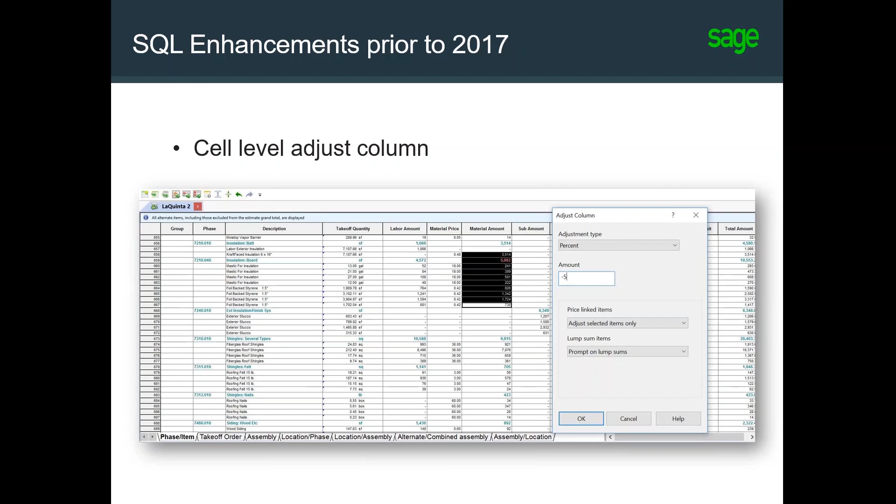They've updated the ribbon bar. In 17.11 there were 15 enhancements. A major one of those was updating the ribbon bar to comply with the latest Microsoft standards and such. You can also insert a column right from the spreadsheet, which makes it really easy to just add those on the fly if you need to.

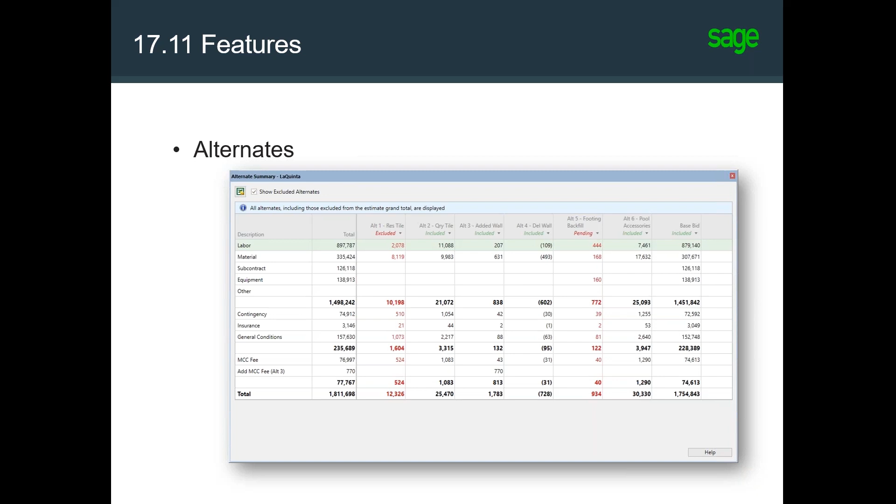So there's material prices added to the spreadsheet just with a couple of clicks. Alternates are also part of the system now, added. One note here: they were added in 17.11, but they were refined in 18.12. So if you use alternates, please, please, please upgrade to 18.12 because there was some math that was not running right and is now. As well, you can see that we have the red columns there for excluded alternates. I'll show you more in alternates as we go forward.

Also in 17.11, Sage 100 Contractor integration was added. We had 300, they added 100 integration. And data connector, where we can use Excel to populate certain fields in the system, like alternate statuses and locations and things like that.

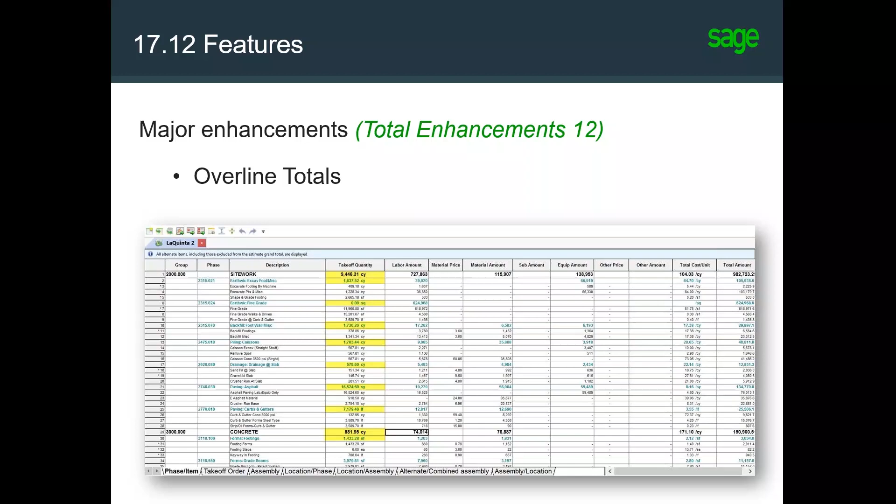In 1712, there were 12 enhancements. We added overline totals, so on the group phase now I can start to sort, sum up, and total to the group phase or phase level with overline totals. The user interface was modernized, made to look more current and cool. And they're always making performance improvements, maybe not as fast as a gold-plated Porsche, but performance enhancements nonetheless to the system.

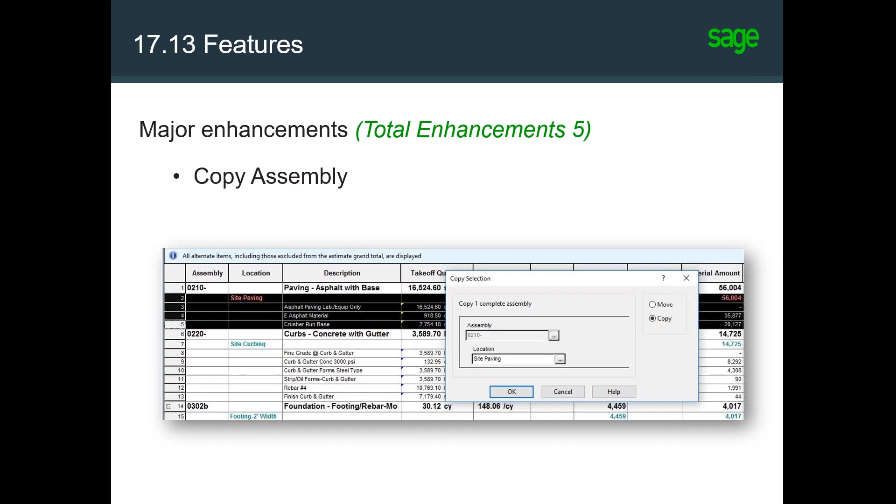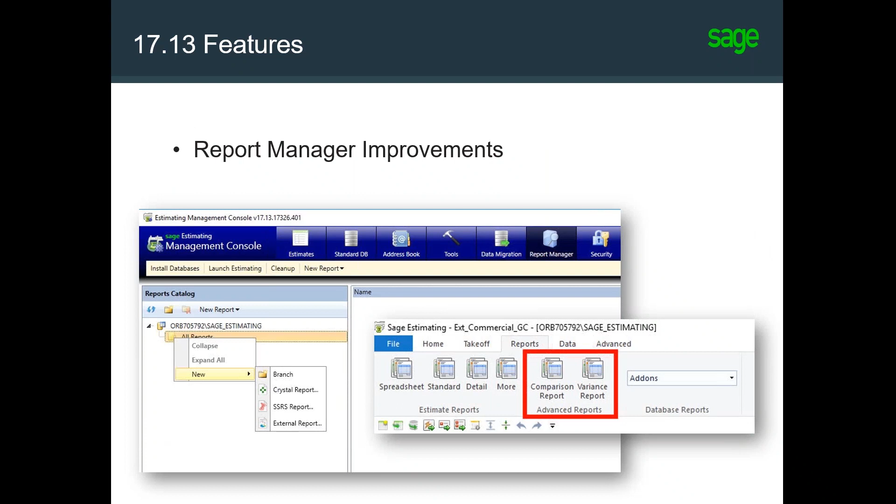In 1713, it was a minor release. There were 5 enhancements. We can now copy assemblies from one estimate to another. You can also move assemblies or items within an estimate using the same feature. Report manager improvements: we now have a comparison and variance report, and we can also use Crystal or SSRS reports. And enhanced database security—this is one of those things, like performance, that they're constantly working on to enhance the system.

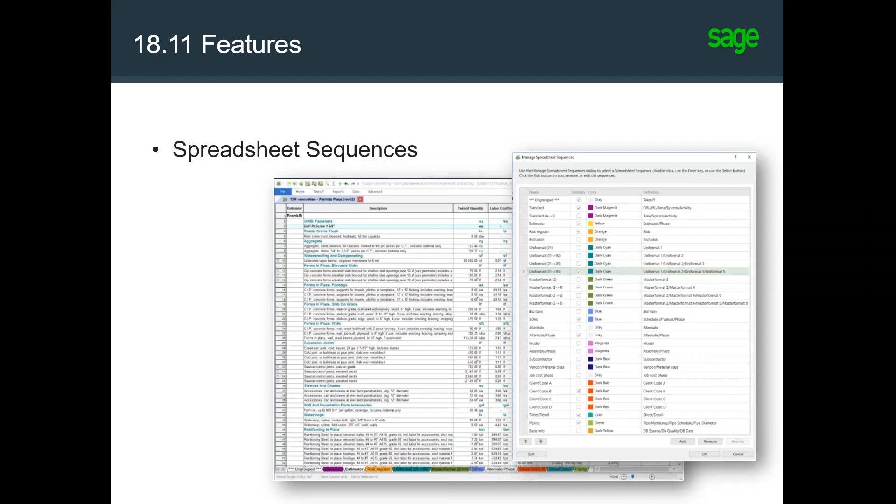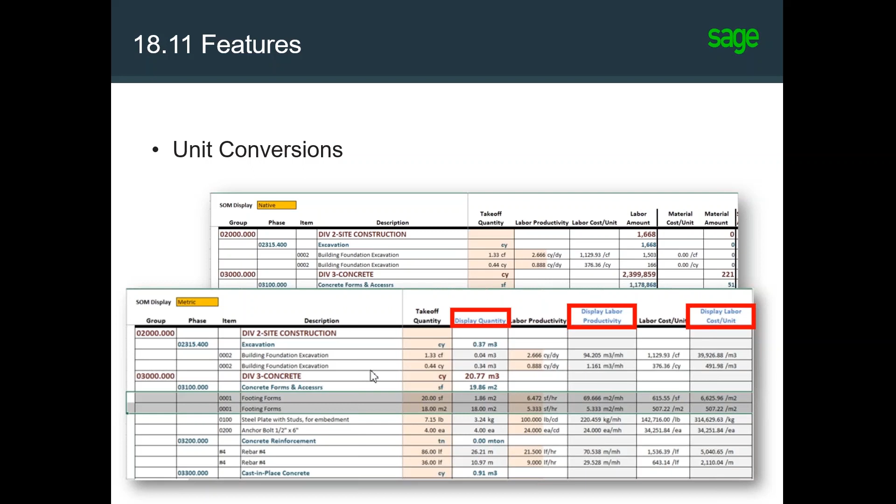Unit conversions: you can now convert from imperial to metric just by displaying the columns on the spreadsheet. There's what I have highlighted there with the display quantity, productivity, and cost per unit in metric. There's more coming on this as well. And finally, more on copy assemblies—that was refined, along with refinements to manage estimates, the report manager, and reporting. So that's just a quick list of the things that have been changed and updated.

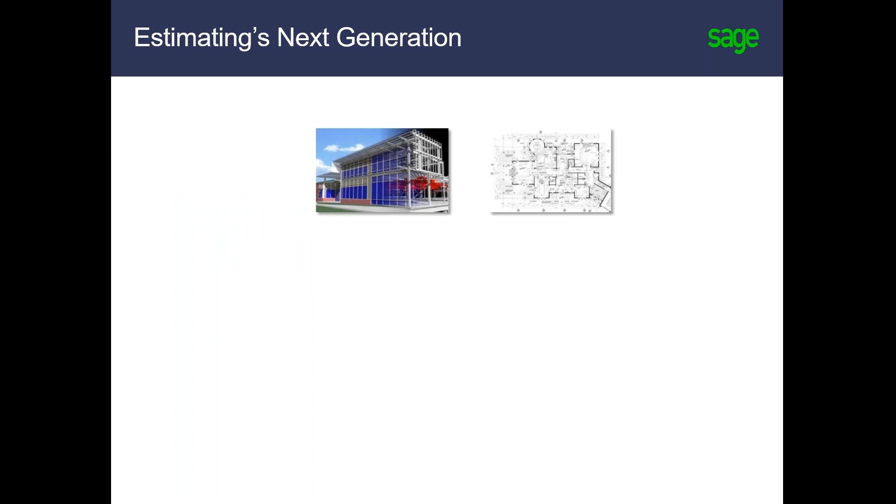We've also worked on estimating's next generation. What do we mean by that? We mean we are going to work with best-in-class solutions to get information out of a model or a plan set. In this next generation, that's where you're going to get your information—a model or a PDF plan set, whether individual sheets or a file. We're going to use Navisworks Assemble or eTakeoff Dimension to get information out of those takeoff sources, the model or the plan set. We're not going to develop our own viewer—it doesn't make a lot of sense and ties up a lot of resources. So we're going to use what other people have already created and what the bulk of the industry already uses.

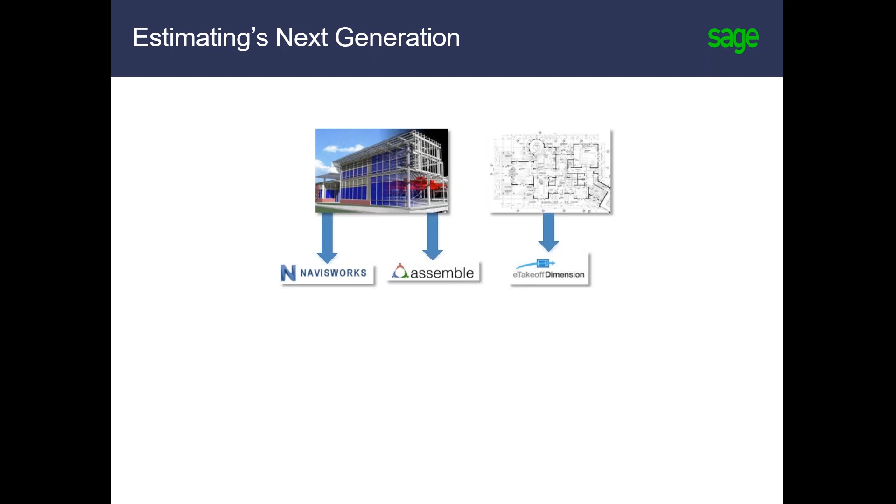So we're going to take those best-in-class solutions and bring them into Bridge. Bridge is another piece of software that is just that—a bridge between those best-in-class solutions and Sage Estimating. One bridge for all three: same product, same process, same features, and they all work with Bridge to bring your information from takeoff into Sage Estimating. Notice all the arrows flow from takeoff into estimating. They also flow from estimating back to takeoff, so you can drill down from the estimate into those takeoff sources and see where the numbers came from. I will show you that here in a bit. But that is what our data flow is going to look like.

And so with that, let's actually look at the demo here. We are going to start with eTakeoff. Here's eTakeoff—it is the 2D plan takeoff tool that we work with.

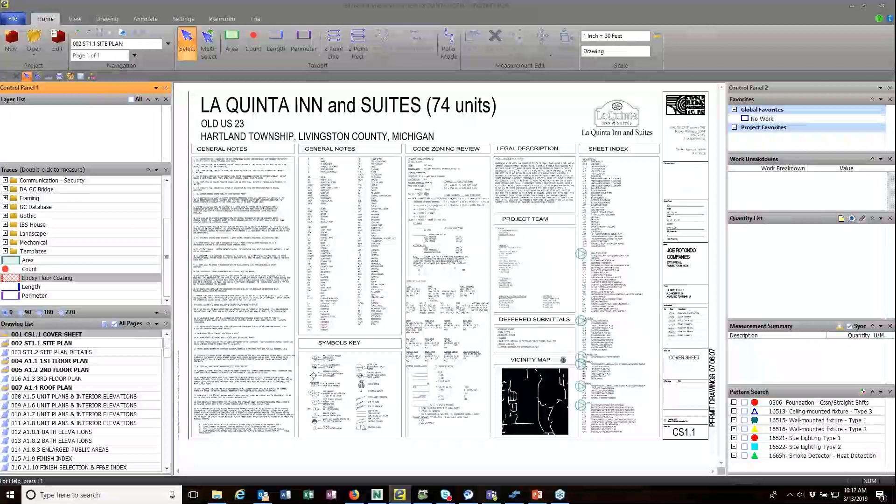In the middle is the plan set, and on the left I have my drawing set, with anything bold having takeoff done to the sheet. Right above it I have traces, which are measurements we use to create the measurements. Over on the right I have another control panel with my results. So if I go here to the site plan, I've got asphalt paving, curbing, and sidewalks, and an automatically generated measurement summary where I can see all the different takeoffs I've done and their quantities.

This asphalt paving, the lovely green color, was created using a trace right here - this one, 0210 paving asphalt with base. If I click on this, you can see not only the area I traced on the drawing, but over here in the quantity list I've answered some questions about the paving thickness and area, base depth, mix code, and other things. If you're familiar with Sage estimating, you might recognize these as assembly variables or assembly prompts.

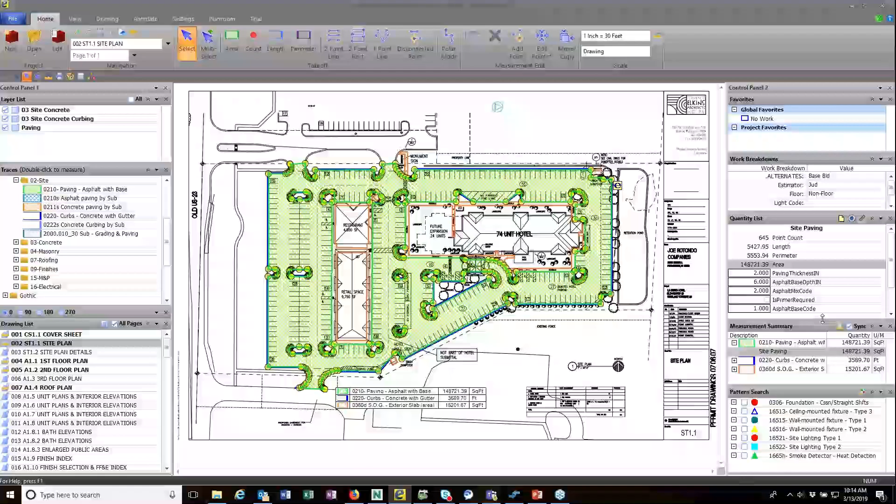We're reading the Sage assembly and filling out this detail and specification related information while doing takeoff, so I'm not having to flip back and forth, do some takeoff, then enter detail information, and go back and forth. I'm doing it all at once. So I can enter in the quantity list detail and spec related information.

And here above that, I can enter work breakdown information. So I can say this is an alternate, I'm the estimator, and it's not on a floor but it is part of the site. You can create your own WBS codes and populate those WBS codes here while doing takeoff, and they will flow into Sage Estimating.

So there's that. First floor, I've got some walls and here's my measurement summary. I've got some walls, some epoxy floor coating here around the pool deck and in some other rooms here. I'm going to do this really quickly.

I should have done this beforehand, but I'm going to delete these. And I'm going to say yes, and now that goes away. That's nice and simple. And down here I've got another epoxy floor coating trace, and it's real easy to create them.

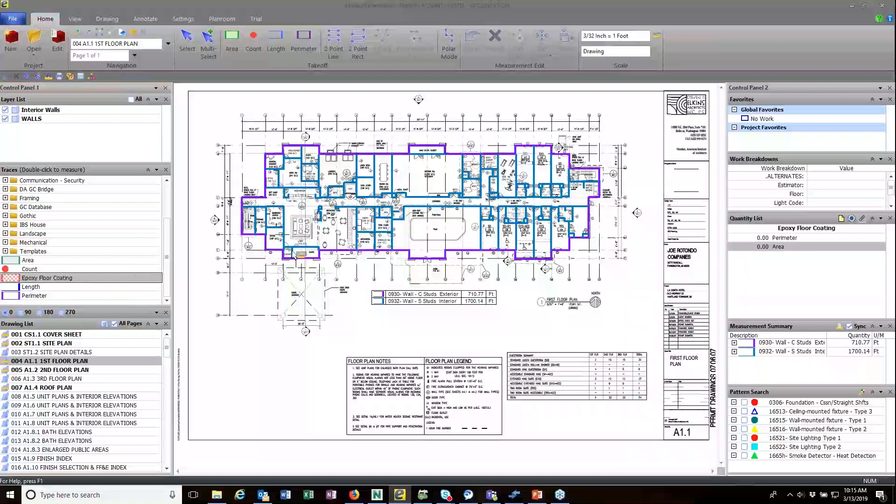I can just click this button and create a trace. They're real simple. But to use them, I can double click on this, zoom in here, and start to trace around the pool, like this, and this, and this, and that. So I've traced the pool area. I can zoom in real tight and get really spot on with those intersections if I want to. You see over here on the quantity list it's 1,900 square feet.

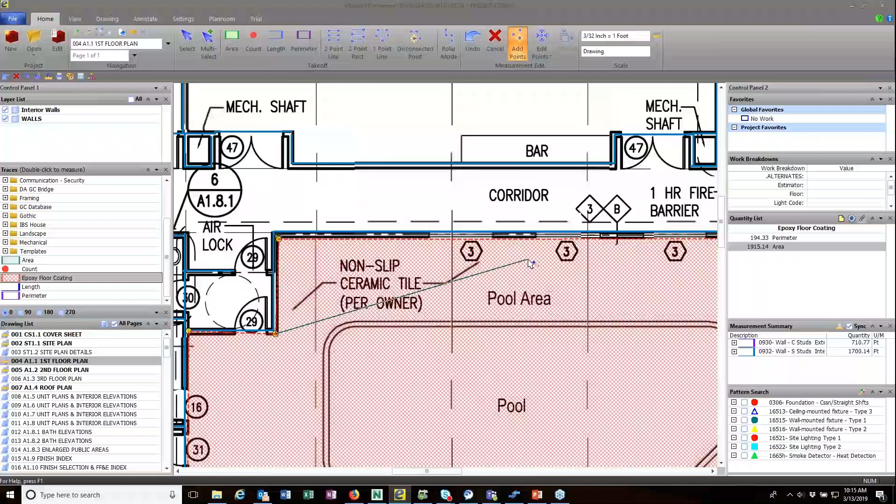Okay, well that's fine, but I need to take the pool out. That's no good - I don't need to epoxy coat the pool.

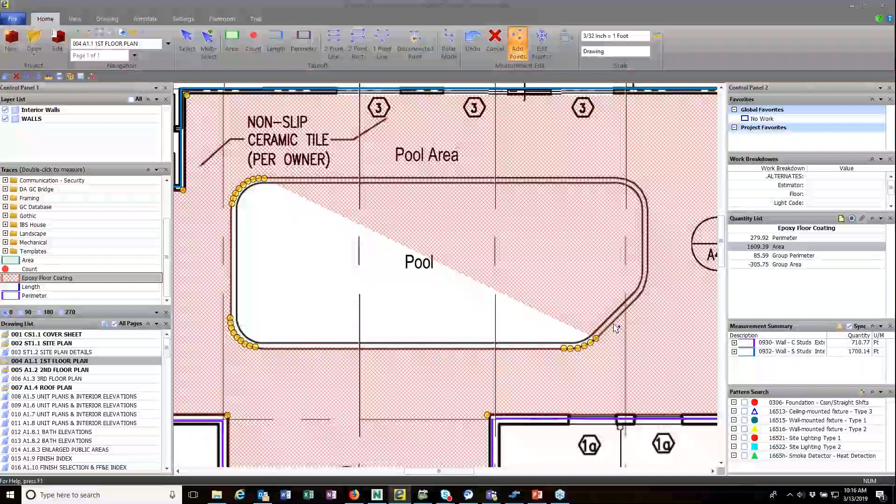So I can use this disconnected point button up here, and I can just click the beginning, the middle, and the end of that curve, hit the C key, the beginning, the middle, and the end of that curve, hit the C key, beginning, middle, end of that one, and I'm just going to trace around here, and this one, and this one, and that one.

C key. I can hit the D key and enter in a description - let's call it pool. And so now I've got pool epoxy floor coating, and it's 1,300 square feet.

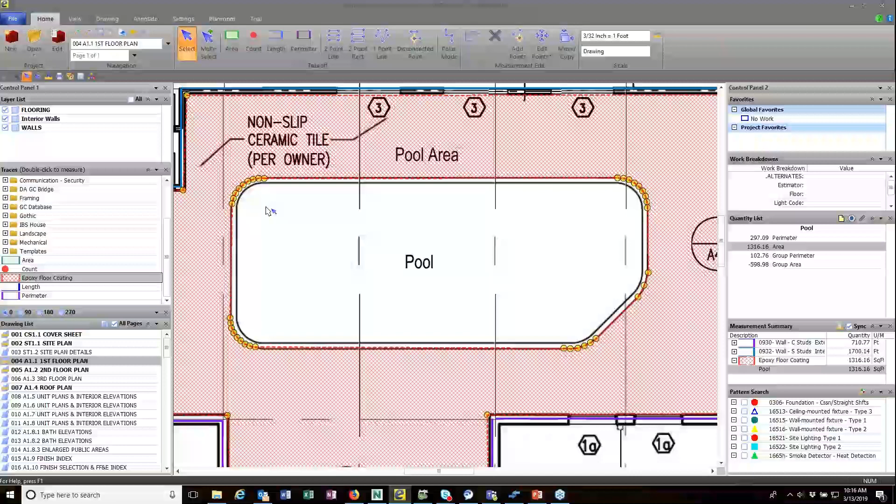So you'll notice that when I did the original trace, I went clockwise. When I did the donut in the middle, I went counterclockwise. That's the key to getting that removed.

I can also add - let's do some more here. I'm going to put epoxy floor coating in these two rooms right here. I can do this, and I can do this. Okay, so I can do takeoff pretty easily. It's quick. We'll just call this

mechanical rooms. And now over here on the right I can see those different takeoffs. Let's just do this - I'm going to come up here and select this, let's select this, and I'm going to say that these two are part of the base bid. The estimator is Jud, and the floor is first floor.

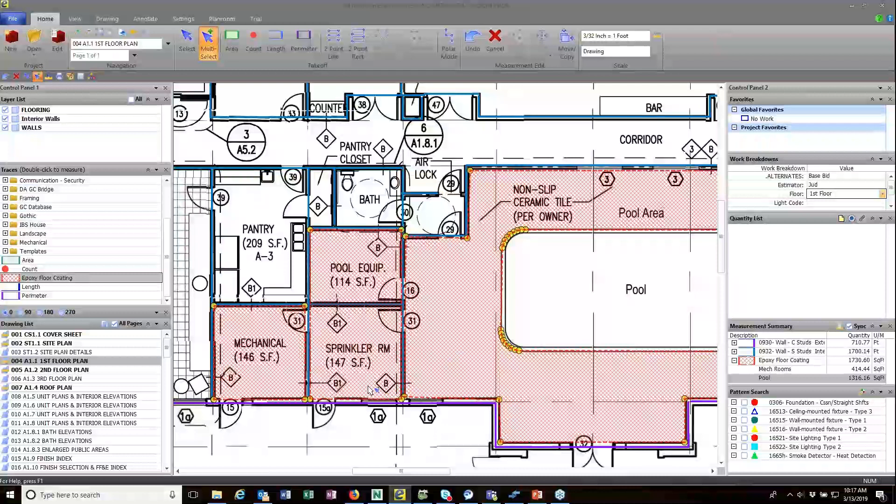I've now completed my takeoff for the pool deck. You can see that was pretty quick, and it will be very quick to send it over to the estimate. Let's go here to the second floor - I've got all of these traces here. These are all different kinds of carpet and base.

Again, same thing. I just went around, traced around, whether it's length or area. If I go here to the third floor, you'll see that the third floor is a mirror image of the second floor, a copy of the second floor.

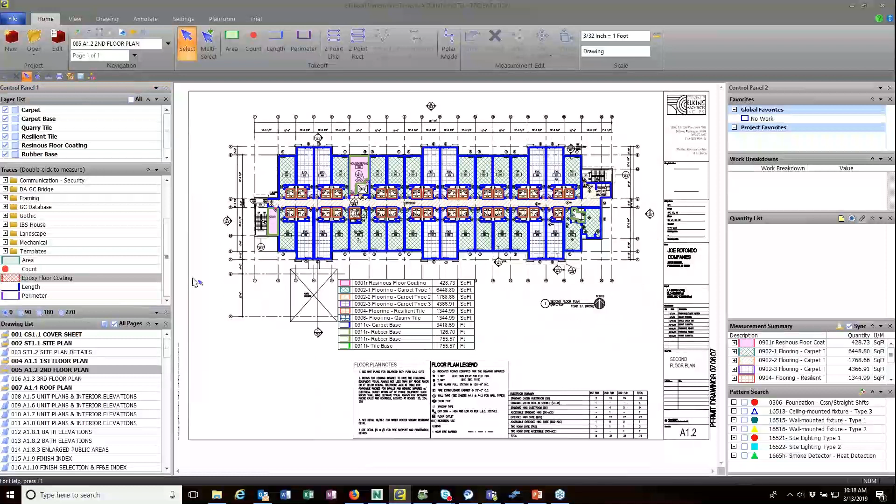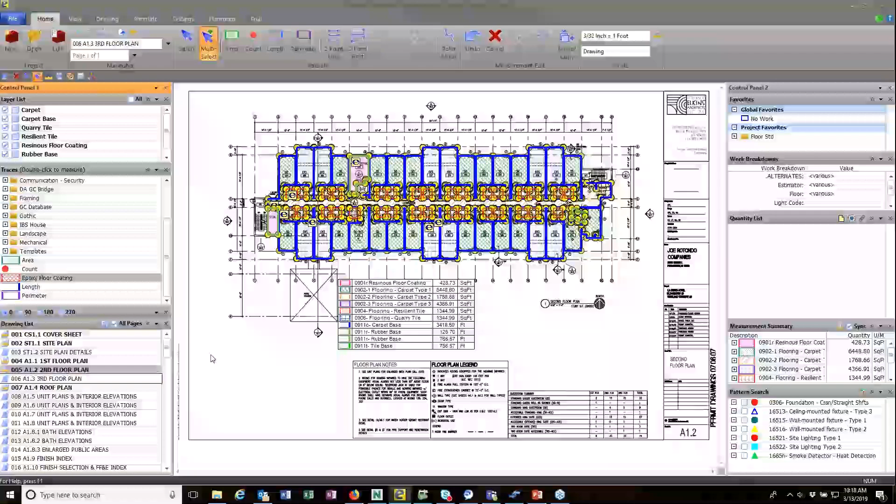So rather than redo it all, what I can do is copy it. I can multi-select all of these and drag them over here to the project favorites. It says 10 measurements, so I can just call it flooring standard in case I had a bunch of them. Go here to the third floor, and I can take that flooring standard and drag and drop it back like that.

So now I'm almost done. I've created the third floor. I'm going to click this multi-select button again, select these, and say that this is the third floor. You'll notice that the alternates are various. Why is that? That's because I've assigned my alternates here in takeoff.

Over here on the left, I've got layers. So if I turn all of these layers off, I can say just show me the carpet, and there's the carpet. Or I can turn off the carpet and say just show me the quarry tile, and here's the quarry tile in the bathrooms.

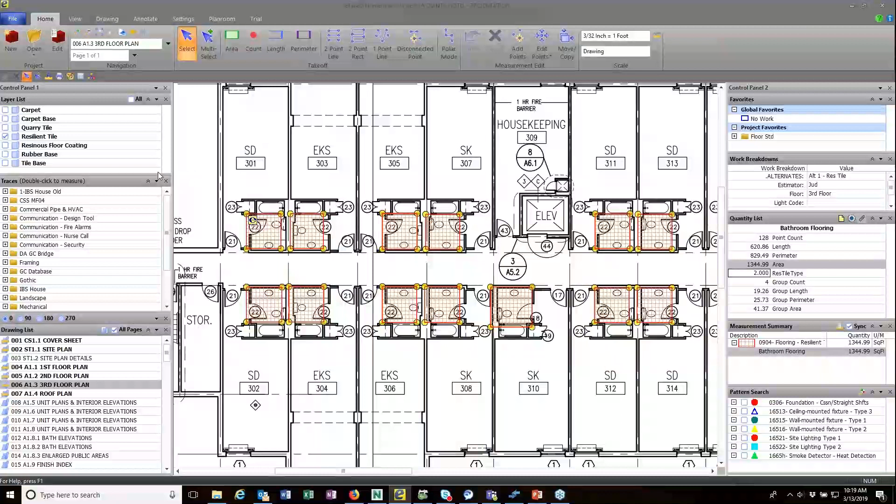If I select that, it says that's alternate number 2 on the third floor quarry tile. I can turn off the quarry tile and select resilient tile, and that's alternate number 1. So I've assigned alternates here on the takeoff while doing takeoff in the plan set. Turn all these back on so we can see everything, and there we are. So now we're back to where we started from.

So you can copy measurements, whether it's flooring or whatever it is that you do, from one area or one floor or one drawing to another.

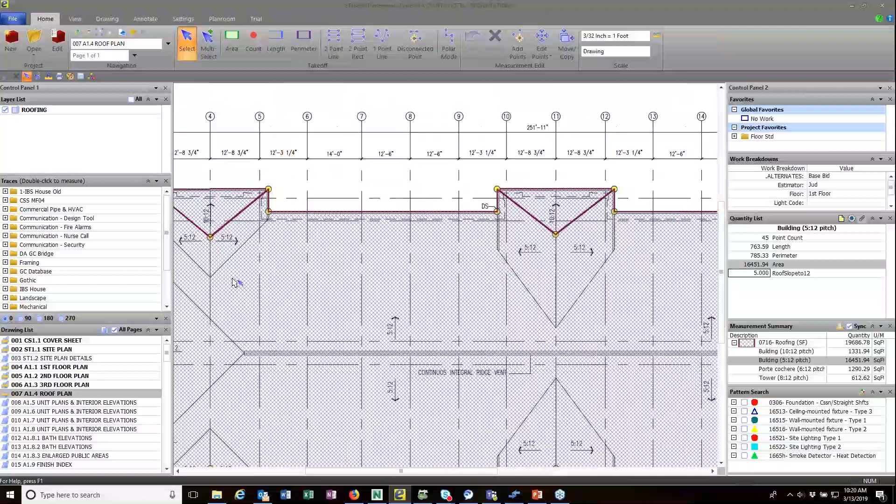The roof plan is just a very simple roof plan. It does have—I did enter the roof slope to 12 so that the system automatically calculates the area, the number of bundles of shingles that I need, rather than just the plan area.

On the exterior elevations, you can do exterior elevation takeoff as well as plan takeoff, doesn't matter. All we're doing is tracing areas around a PDF.

If I come down here to the foundation plan, I've got several things going on here. I've got these structural slabs, grade beams, footings on the outside, and these caissons around here. Let me delete this because I want to show you how these caissons were found. These were found using a feature called pattern search.

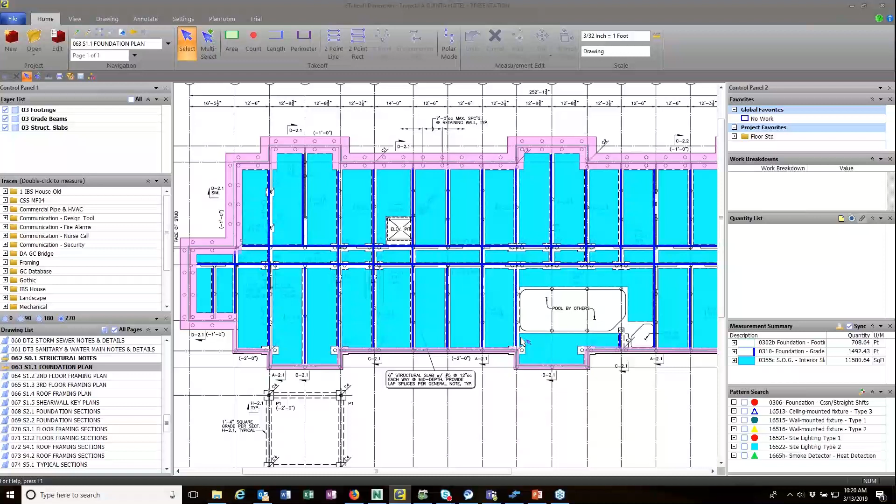If I'm going to do pattern search, what I want to do here is show the search areas. This is the area I want it to search in—I don't want it to search out here in all this extra white space. I just want it to search in this area, because I don't want it to count in schedules or keys or things like that, just the plan area. So I define a search area and called it S1.1 to match the sheet number down here. You can call it whatever works best for you.

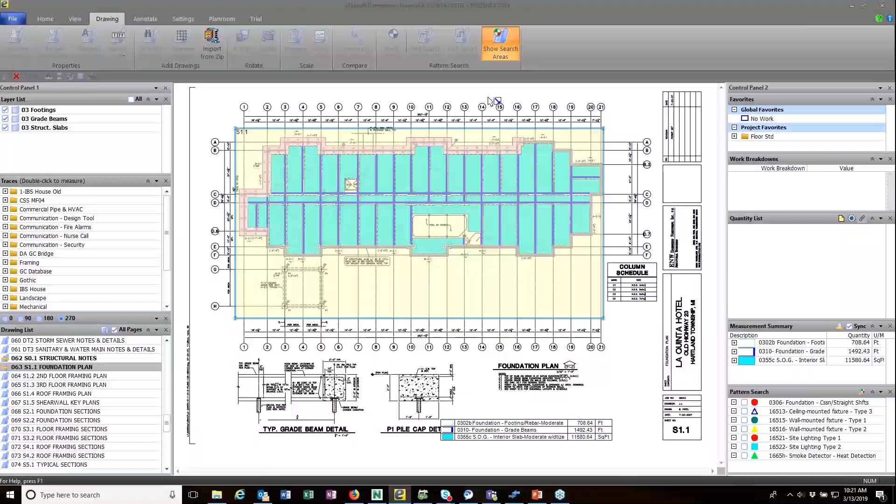When I get the search area done, I can click this Start Resume button up here, and my cursor changes—now it has that little square with an arrow in it. I'm going to zoom in nice and tight right around this caisson and say I want it to look for that. Pattern search can work on a pattern like this dashed circle, it can work on text, it can work on whatever it is you want to search for. And it does a fairly good job of finding things too.

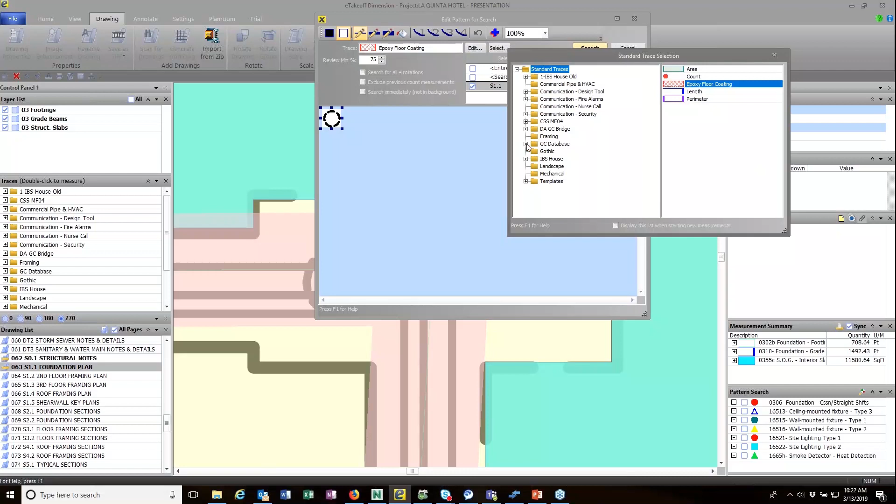So it depends on what you're searching for. I wanted to search for this, so where do I want it to search? I want it to search that S1.1 area, that light yellow area. And what is it? Well, it's not epoxy floor coating, that's the trace. It is GC database concrete. It's a caisson, so this is what I'm looking for, this is where I'm looking, this is what it is.

And I click search, and down here in the bottom right you can see the progress of my search. It's found 100, and there we go. And it found 244 of them.

So I'm going to double click on this, and these are all the ones that it found. You can see some of them are nice and clear, like the one that I picked, and some have got a little kind of stuff going on in the middle, but it found them all, so that's good.

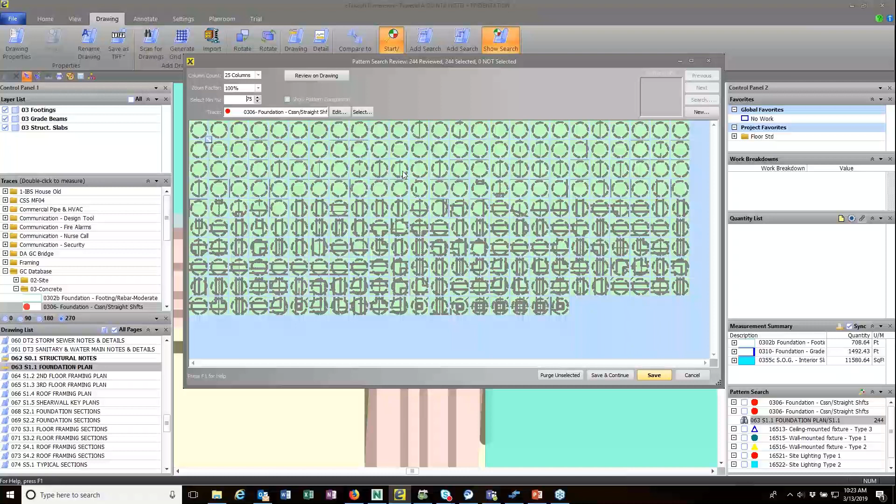What I want to do is review them on the drawing, so I click that button, and there's all the ones that it found. I can say, well, those look good, except I know that this one, and this one, and this one, and this one, for the portico, are going to have different depths than the ones on the building.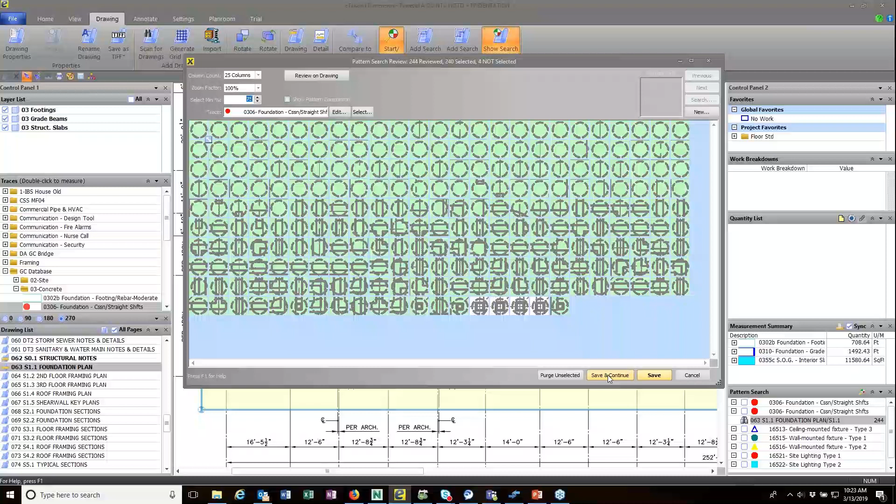So I can say okay, that's good, go back to this Start Resume. Now you see these 4 are removed from our selection set. Anything that's green is part of it, anything that's white is not. I'm going to click this Save and Continue button, and now that removes all of those from the building. And then I'm going to just save those.

So I've just counted all the caissons, but I've got 2 different sets. And you can see here this little red E right here. If I select this, it says, oh well, you haven't entered the depth of the caisson. So I'll just say that it's 30 feet, enter. And I'm going to say that these are 20 feet, enter.

Now I can also come in here and I can go to home and I can multi-select, and I can say this and this. This is all part of the base bid. And it's on, I know it's, we'll just say it's the first floor for this. And so now I've done that, and I can enter in these other ones as well, other WBS codes as well.

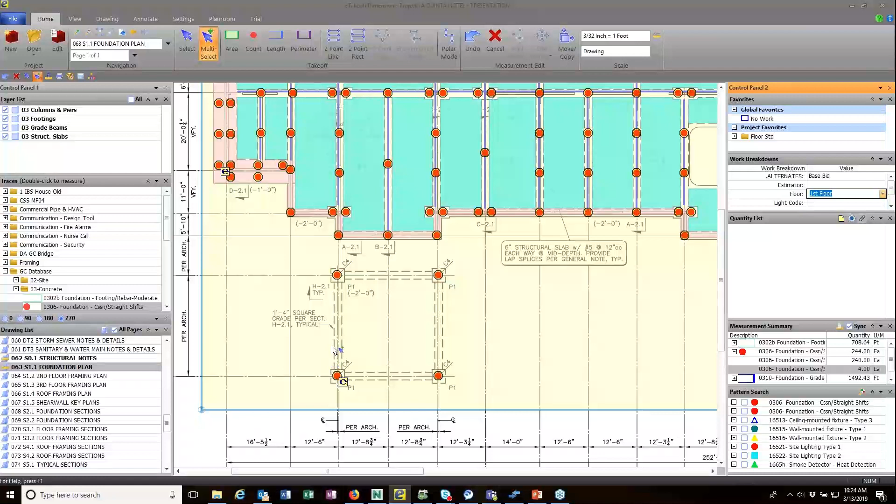All right, so pattern search is a cool feature. And also looking here at the interior elevations, here on this sheet, same thing, got the measurement summary here, but what I wanted to show you here is most of these elevations are 1/2 inch equals a foot. This one over here is an enlarged floor plan, it's 1/4 inch equals a foot. And down here's a detail at 6 inch equals a foot.

I can have multiple scales on the same drawing. So other systems make you copy the drawing and set a scale for the entire one. This does not. We've got a standard scale up here, you can see it's 1/2 inch equals a foot for the whole drawing. And then everything inside this blue box is 1/4 inch equals a foot, and everything inside this box is 6 inch equals a foot. So you can have as many different scales on a drawing as you want.

The other thing that we can do here, I'll show you on this drawing, is that we can compare drawings. So I click this compare and go here, and what do I want to compare it to? There's an addenda that I have. So I'm going to click that, and I click the align button because I may want to align it.

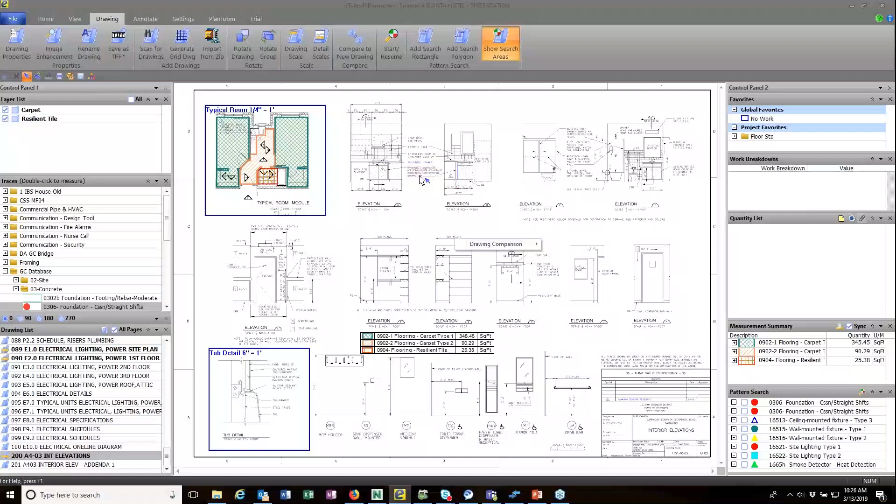So let's go back here, and I can zoom in. Here's the changes, and I can highlight those changes. I can say show me, just emphasize the new stuff, or just show everything. So I can start to really see pretty obviously where the changes are.

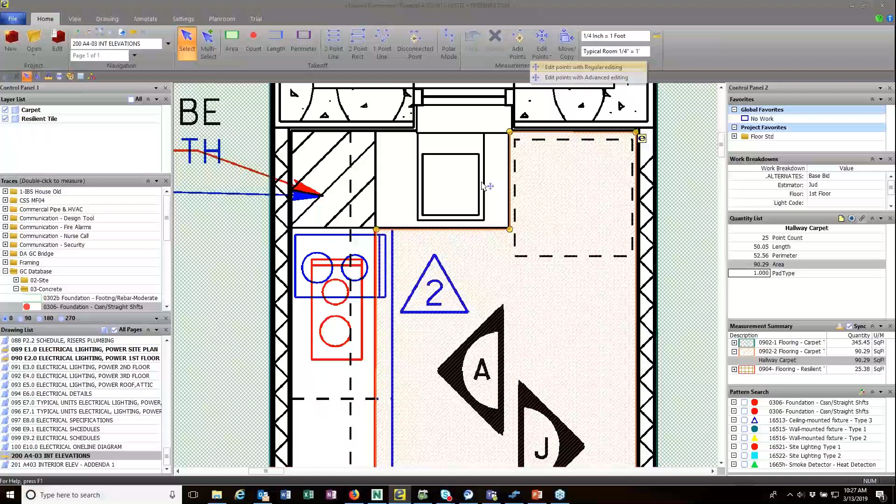In addition, if I come over here and highlight this, you can see I've got changes here. The stove changed from this orientation to this orientation. And I can come in here and edit the point, so I can change my takeoff to match the new configuration. Like this, you would add another point in here to get through to this little area, but you can start to change your takeoff to match that new configuration.

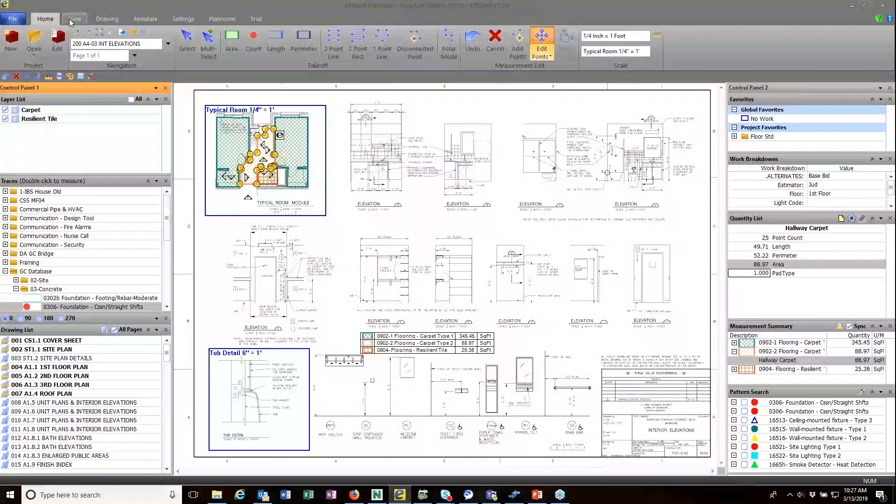All right, so takeoff, lots of features in there. There's a lot here, but what I want to do now is show you how we can bridge that over to our estimate. So I'm going to click the View button. I'm going to start Bridge, and remember, Bridge is that product that ties the estimate and the takeoff together.

This is just saying there are no bridges associated. Do I want to create one? And I am going to say yes. It'll...

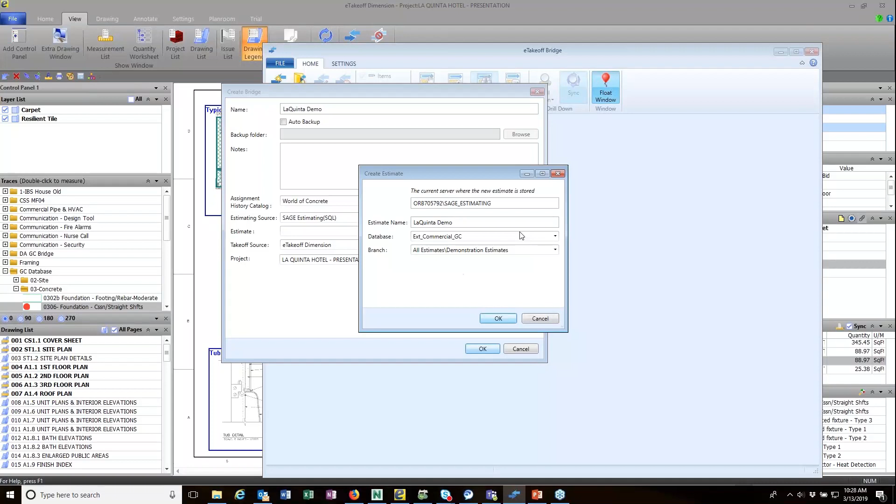LaQuinta Demo is the name of the bridge. I can also create or browse to an existing estimate here. I'm going to create a new one and just call it LaQuinta Demo. And I'm going to click OK. Click OK.

Here is the bridge. It's simple. There's not a lot to it. If I just go here to the file, you can see this is pretty simple. Home is where you spend 99.9% of your time, and the settings is just one button. So it's really simple product. You can learn it in an hour or two.

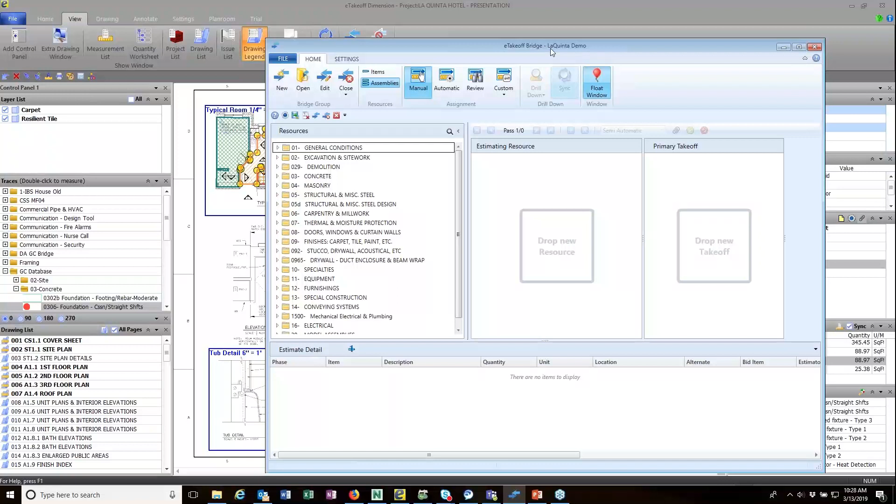What it's showing us here in the left-hand column are the resources. This is our Sage database, it's reading our Sage estimating database. Here is my list of assemblies. I can also read items. So I've got concrete, and there's my different concrete assemblies, and I've got other things. You can see I've got a whole list of assemblies in here. Items, I can say there's doors, and there's wood doors, and there's all my wood doors in my Sage database.

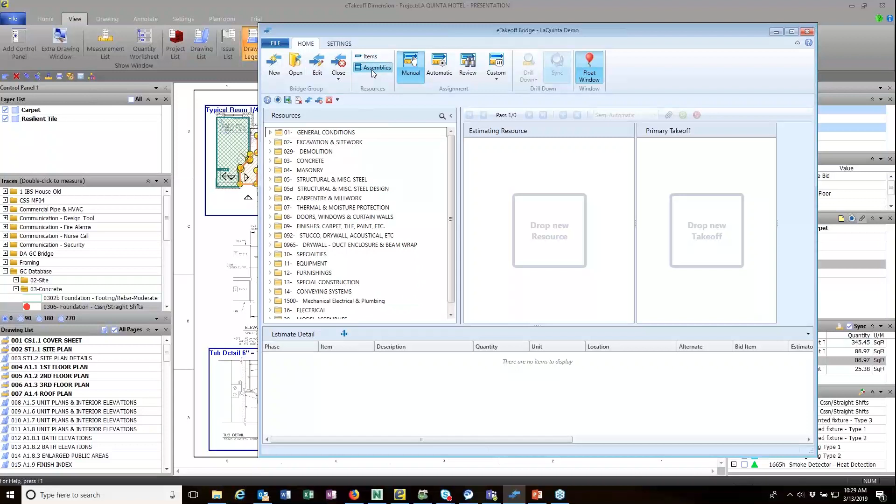Question is, why do I care? The reason that I care is that I want to map measurements from my takeoff to wherever they go here in Sage Estimating. So for example, on that first floor, we did that epoxy floor coating. So what I want to do is, I know that there is an assembly here, epoxy floor coating. What I do is I take this and drag it and drop it to epoxy floor coating.

And then what I need to do is say, okay, here is the assembly, this is what the assembly expects. It's a very, very simple assembly, it only wants the area of the epoxy floor coating, doesn't want anything else. And this is the information I have available from takeoff over here on the right. You can see that I've got an area, and then I've got an area here. And all I did to map those was drag and drop.

And I did the same down here with WBS information. So there's the drawing description got mapped to location, and the alternate got mapped to base bid, base bid got mapped to the alternate, and the estimator got mapped to the estimator, and the floor got mapped to the first floor. So I've mapped these.

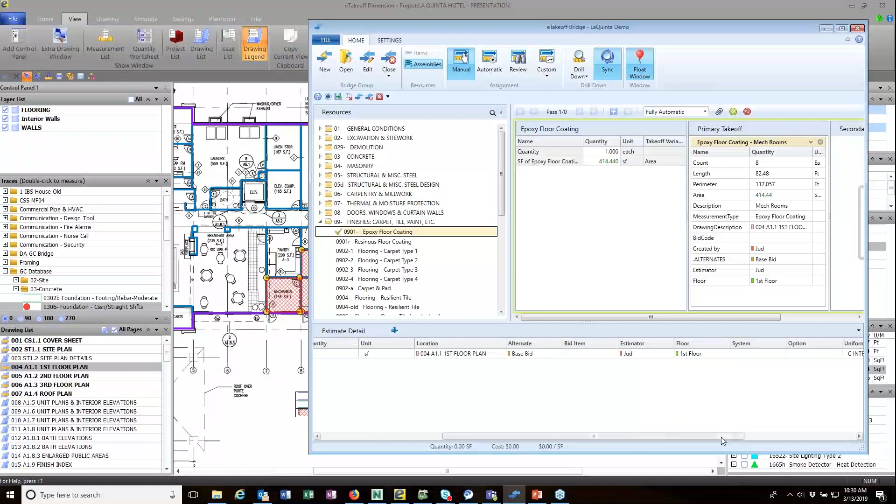Now the question that I get a lot is, so do I have to map it every time I do this? And the answer is no. I only need to map this during setup. Once mapped, always mapped is our saying. So if you've mapped these variables, these assemblies once, you never have to do it again for this project, for the next project, next week, next month, next year. And you can also share them with others in your company. So the mapping is once mapped, always mapped, and it's powerful because it does remember what you've done.

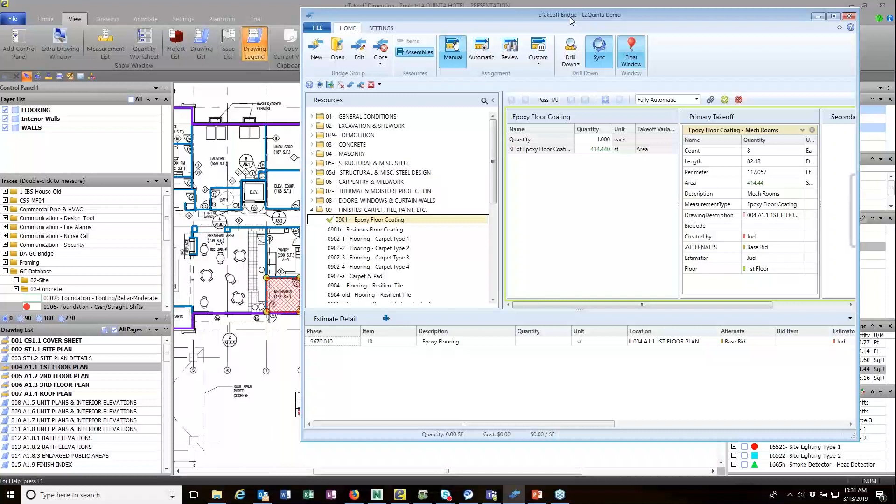And so going forward, it's really easy. Once you get this, it's initial setup only. Once you're done, it's quick, and I'll show you, you'll see that in just a second. Once you have done the mapping, notice I don't have any quantity down here. I don't, until I run the pass. That's this button. Now I get the quantity, and now I can send it to the estimate.

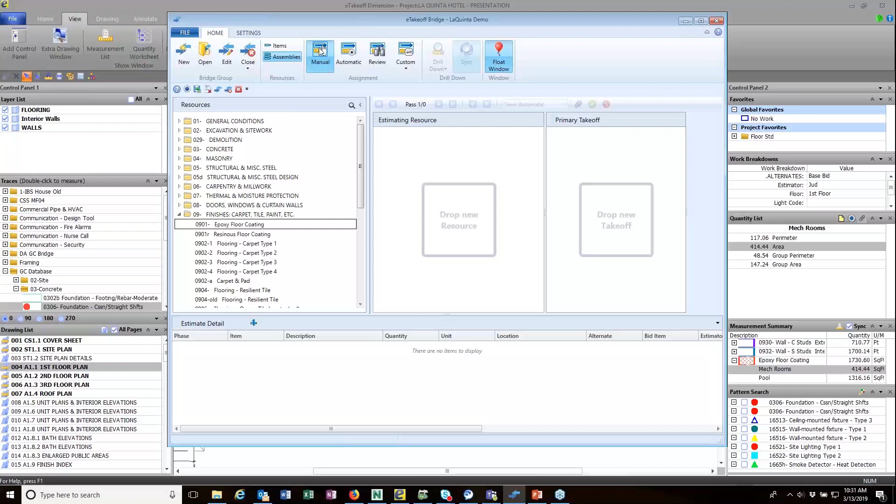So that's how you can manually send measurements to the estimate. Kind of long, a little bit clunky, but definitely something that's available for you as we're going forward.

And the other thing is that... just lost my train of thought.

That's manual takeoff. We also have automatic takeoff. So these are assignments or measurements that I've been through. I know that I got everything entered, and if I didn't, the system will catch it for me. So I just want to get these over into the estimate.

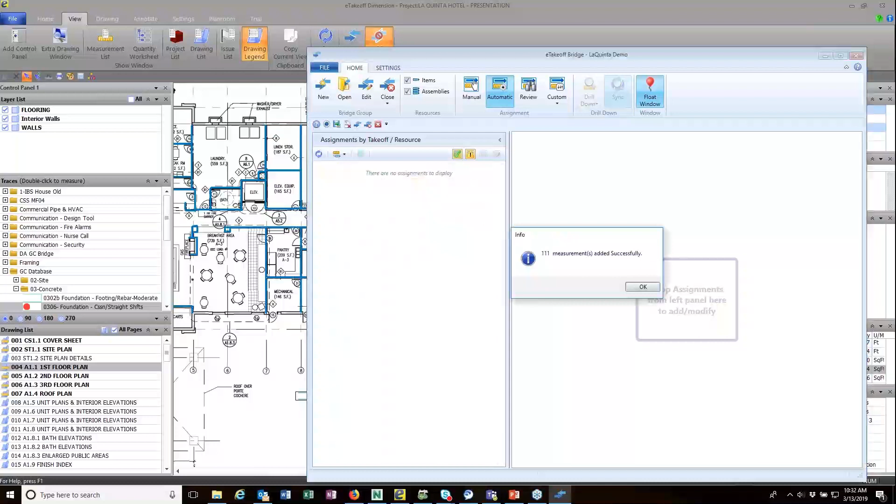So I can click this automatic button, and I can send 111 measurements over to my estimate while we're sitting here talking a little bit. So it's very quick, it's very thorough, and notice that I didn't have to cut, copy, or paste anything. All I'm doing is entering in the information here during takeoff, and then I'm passing that information to the estimate. So I'm going to click close.

I'm going to go to the estimate and minimize bridge, and here is my estimate. This is Sage Estimating 1812. You can see that we got a little bit different look. If you're used to looking at Pervasive, you'll notice that this is different. We've got home, we got takeoff, reports, there's the database, and the advanced as well.

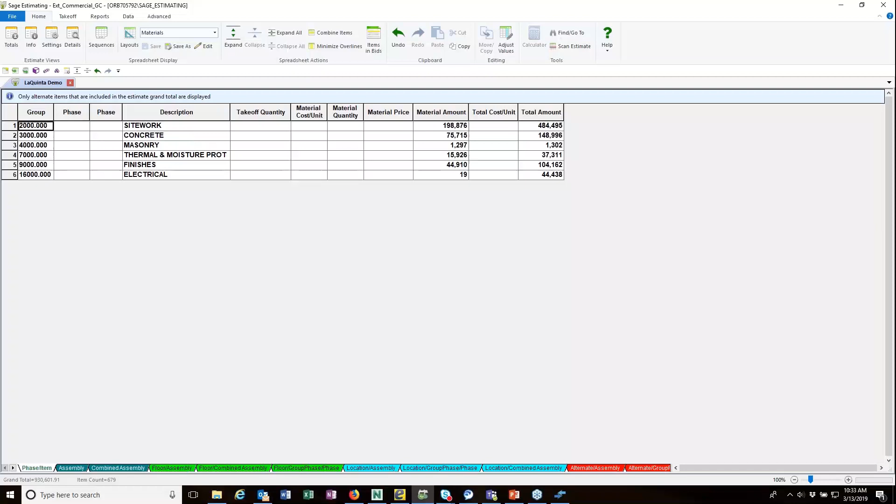On the home here, different things here we can do with a spreadsheet, right? We can collapse it down to summarize. There's a group phase and phase. There's just by group phase, or CSI division, same thing. Expand it back up. We can combine like items.

Watch the fine grade right here. And there we go. There's the fine grade all combined up. So there's things that we can do with the spreadsheet just like that.

One of the main differences here that I wanted to highlight is this spreadsheet display tab or area here. And we've got different sequences. Remember the sequences that I showed you in the PowerPoint? I've got these sequences set up down here. Unlimited number of sequences. I've colored them based on the first sort option.

So my assemblies are dark green and my floor group sequences are bright green and location, and then alternates. And then back down here at the very end, I've got one for job cost, an estimator. And so I can start to sort these anywhere or group these just like this. And I can do combined assembly, looks the same there.

And the thing is too now, layouts are not tied to the sequence. And so I have assembly view sequence and an assembly layout. I can switch this to labor productivity by assembly, or materials by assembly, or whatever I wanted to do. I can do that, and I don't need to recreate the layout for each sequence. They're interchangeable. And so that's kind of cool.

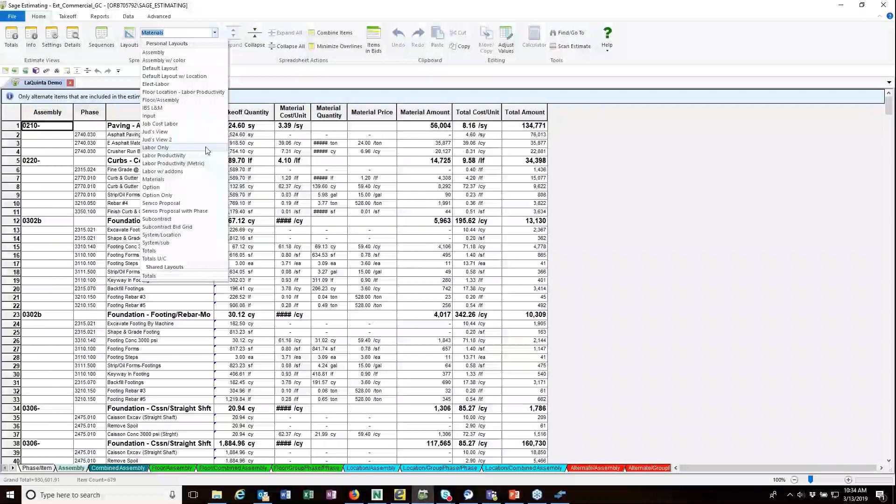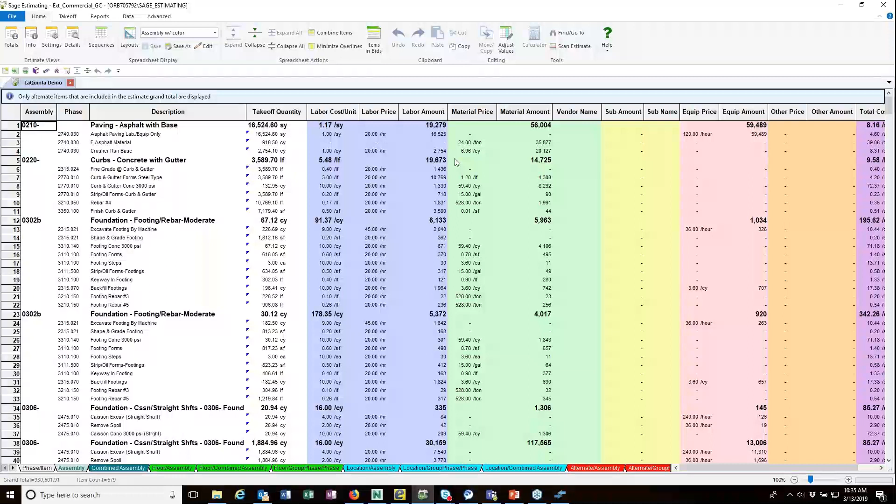I can even go wild and crazy and do a bunch of colors, which might not be a bad idea. Maybe if I always know that all my labor columns are blue and all my material columns are green, maybe this makes sense. So that's up to you. You can start to do some fun things though with it. That's great. I love playing with that just because it's kind of fun to see what I can do.

We also showed you - let's look at the totals here. And so we've got the totals page here. You know about add-ons and how you can allocate or not allocate add-ons.

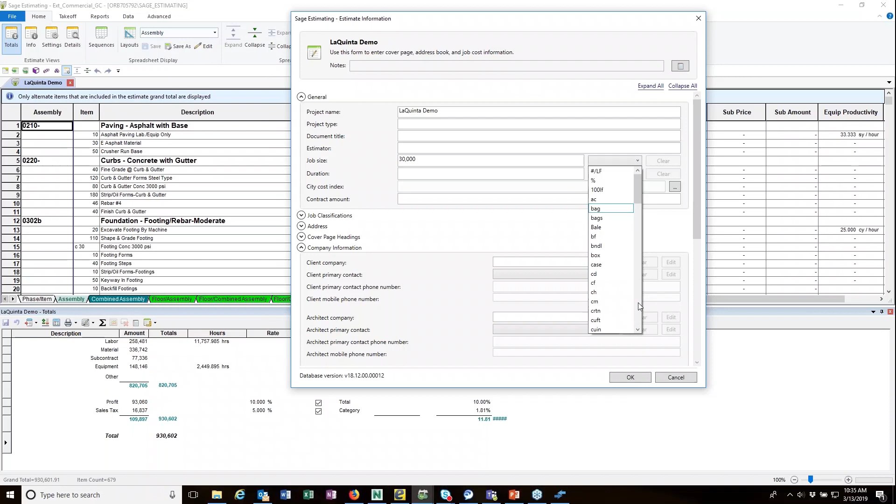If I went here to the information for this estimate, I could say that it is let's say 30,000 square feet. Come on, where are we here? There we go. And square feet. Okay. Now I have this column populated down here.

And so if our boss comes to us and says, you know what? I know the bid's due in 20 minutes, but we got to be at 30 a square foot to be competitive. So you just type in 30, enter, and you know you need to find $30,000 in this estimate. There's lots of ways to do that. I can say, you know what?

Our accounting department is really good, so we can adjust this. We can say we're going to get our materials for 5% less. What does that do for us? Well, that says that we now need to find $10,000, almost $11,000.

I could go through and back this out, I can do that, or I can come over here to the total amount and just adjust this column, and we are going to spread that $11,000, say okay, and trust that we can find that. We're now within $3 of the variance of the total we needed, and each one of these got knocked down 1.2%.

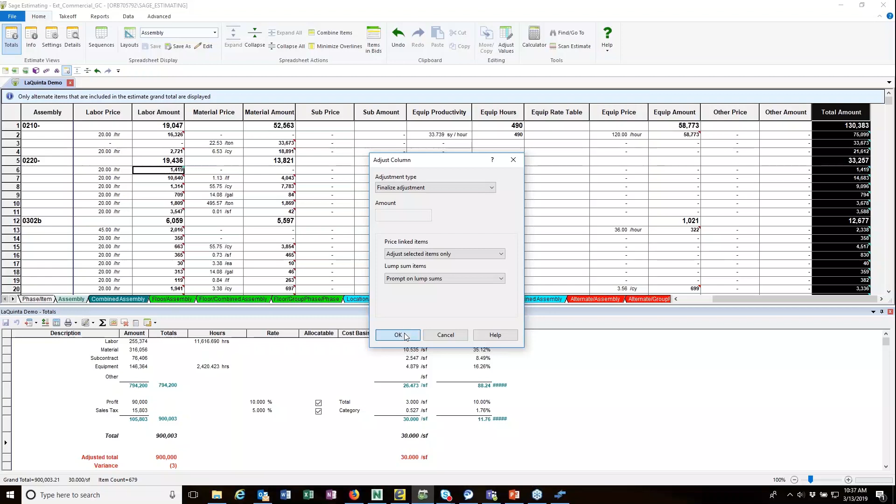So I can do that way. There's ways to adjust your numbers so your accounting department is happy. I can also come in here and finalize that adjustment and say okay, and now it is good to go. All right, so let's do this.

I wanted to also show you alternates. They are part of the system now. So here's the alternates, and I've got 2 of them plus the base bid. Before I do that, let's go to the alternate sequence, and I can see that I have some things that are not assigned to an alternate or base bid.

So I can highlight this and hold my shift key like this, and one way I can do this is just drag and drop down to the base bid. I can also, if I wanted to, select these and do move copy, and move it from one place to another. So 2 ways of doing the same thing.

Now, if I come back up here to alternates, I need to set statuses for these alternates. So I'm going to click the status button and add a status called included, and I do want that included in my estimate. I'm going to add another one called not included, and I do not want to include that in my estimate.

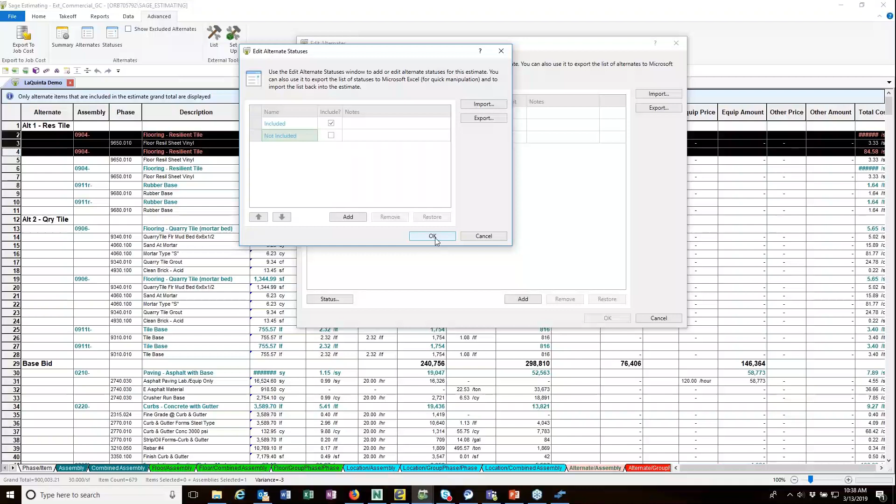Click OK, click cancel, and now I can come over here to the summary sheet. So here's my alternates, alternate 1, alternate 2, and the base bid. I can come over here and say that is definitely included. And these I don't know yet, so I'm going to say not included and not included.

I don't see them because I don't have, if I check this, now I do see them, and I also see them on my spreadsheet. If I say I like quarry tile today, I can include that one. These yellow marks all go away, and then the 863 plus the 23,000 is 886. This number is not included in that, obviously, because it's not an attached, not an included alternate.

So that's how, and you can start to play back and forth with these things and see what works best for you. You can assign add-ons to alternates. You can do all kinds of things to really get them dialed in for you.

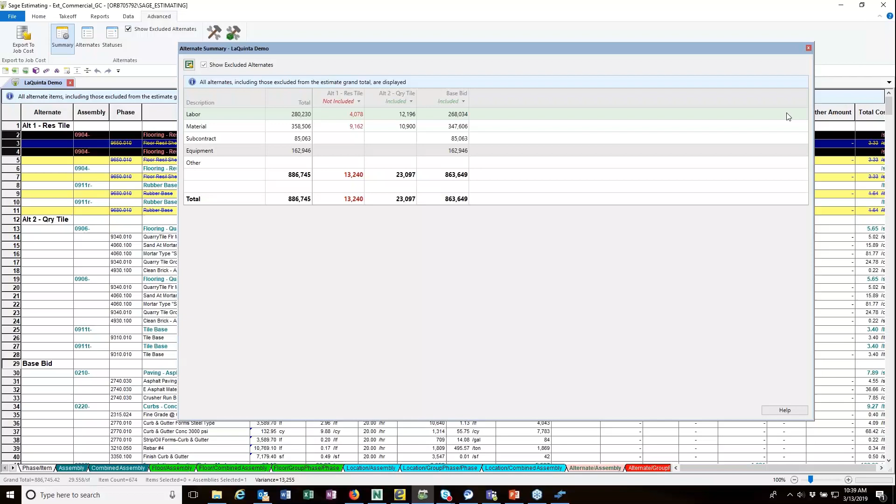And so this is an assembly, asphalt paving with base. And if I reviewed this assembly, and if I click up here, I can view the pass audit. And I have 1 pass. Okay, keep that in mind. 148,000 square feet, 16,500 yards, give or take. Okay, I'm going to close this.

This little blue caret right here in the corner says that the takeoff quantity did not come from Sage Estimating. It came from eTakeoff. And so I can right-click, and I can drill down to bridge.

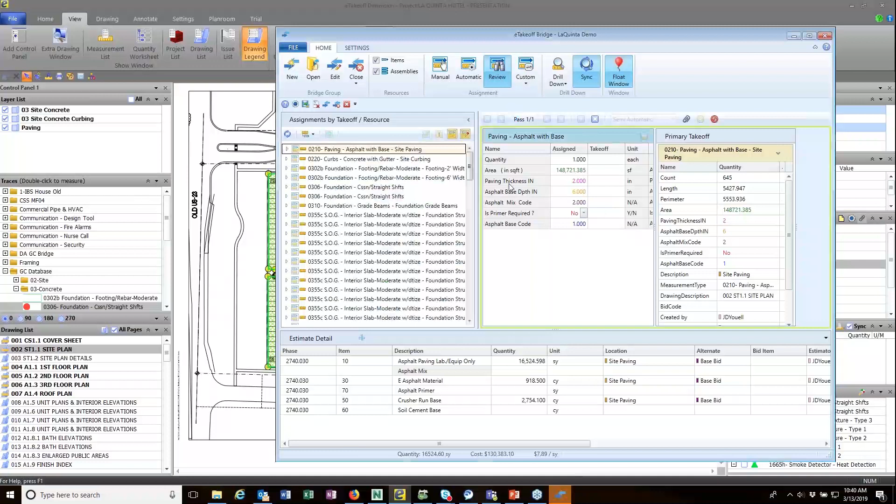When I do that, it opens up Bridge. It highlights the measurements that I took, and it also highlights the measurement, so I know exactly what I entered and where the measurement came from. If somebody comes to you and asks where you got that information, with just a couple of clicks I can show them where it came from.

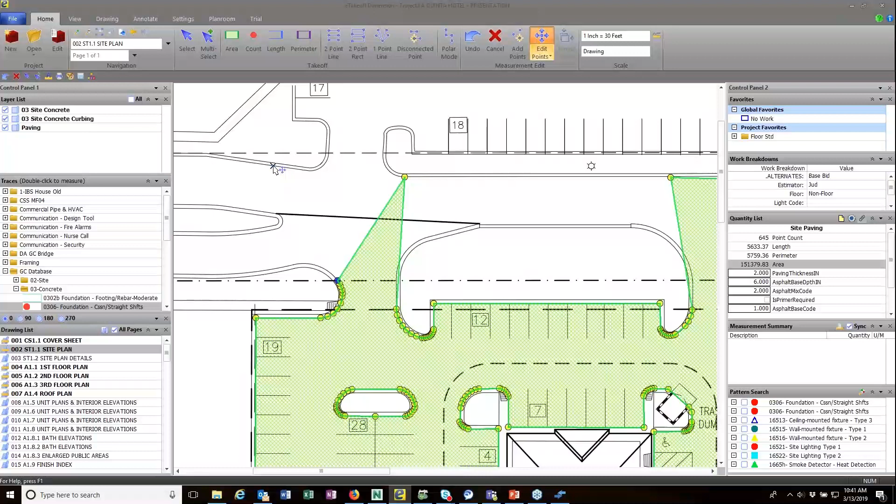I can also make changes. So I can say, this point, I'm going to take it and put it over here, and this one's going to go over there, and I'll take this one over here and this one over there, like that. Doesn't make a lot of sense, looks kind of weird, but the idea is that I can change the measurement.

I can also change the spec and detail information over here in the quantity list. So I can say it's now 4 inches paving thickness and 8 inches of base depth. I've changed the measurement and spec or detail information, and I can go through and do that on all the floors, all the plans, all the drawings, just making those changes.

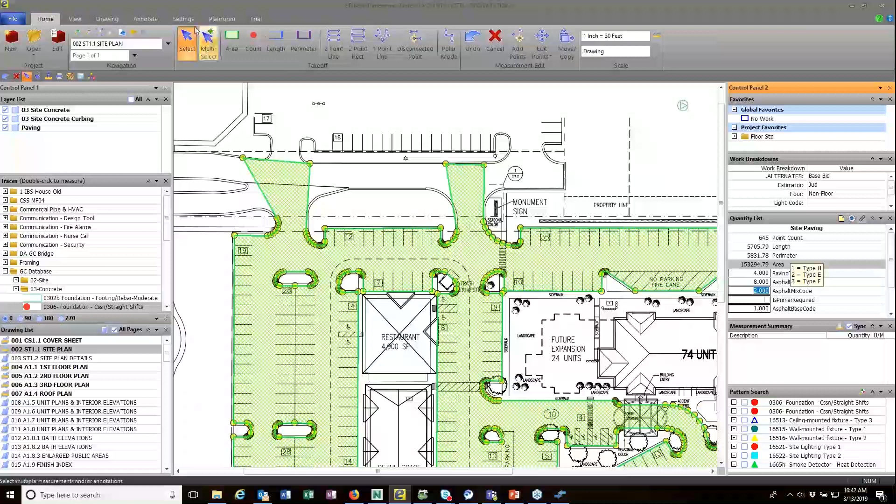When I'm ready to push those changes back to the estimate, I can go back here to View and start Bridge again. This assignments list now becomes really important to me because I can refresh the list. These are the original assignments sent to the estimate. If I refresh the list, it says, oh, there's one that changed.

I can filter out the ones that haven't changed - that's what all these others are. I can say, there's the one that changed. It'll show me all the ones on all the sheets, and it shows here's the changes that you made.

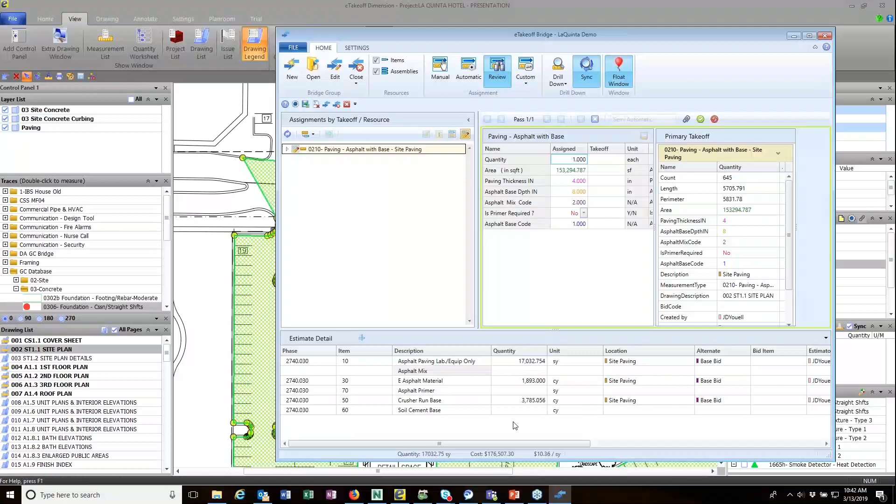I'm going to watch this number down here as it says 16,524. As I accept these changes, it's going to move those all over here, recalculate all of the quantities, and then I can send that to the estimate. Close this, go to the estimate, minimize that - there we go. And there's my new quantities in the asphalt paving with base.

So a lot of value there. Again, I didn't have to cut and copy and paste anything. I'm just entering changes and adjusting the measurement as needed.

You might do things a little differently. You might take a snapshot and save off the original estimate as a snapshot for a particular point in time, and then keep going with any changes here for Rev 1 or Rev 2 or Addendum 1 or whatever you're working with.

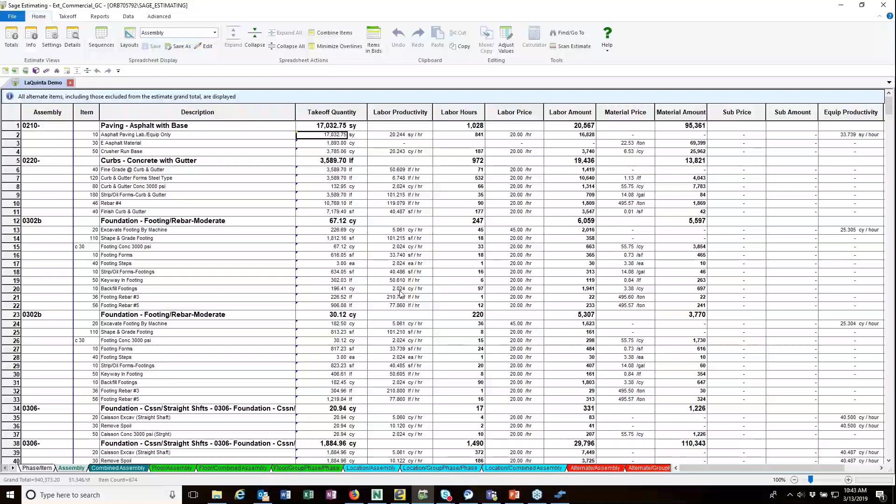So that's what I wanted to show you with Sage Estimating and eTakeoff Dimension. Also wanted to show you how we might work with Navisworks.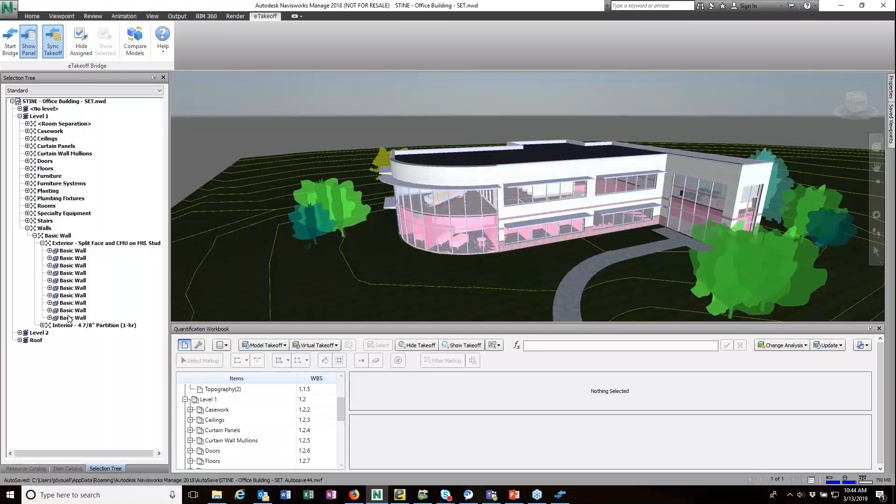So as we have these objects, if you've worked with this, you know there's a wall, and that wall has some properties to it. And here's the properties that it has assigned to it. Thank you, Judy. So we've got properties assigned to that wall.

We've also got down here in the bottom, the quantification workbook. This is Autodesk's Navisworks solution for doing quantity takeoff. We've got something - I think ours is a lot better than this. This is pretty complicated. But we've got this eTakeoff Bridge panel.

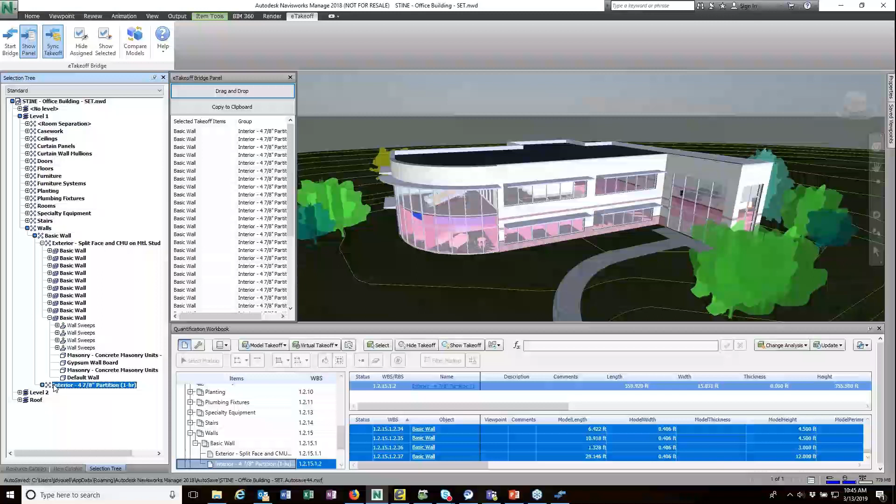And let me just do this. If I hit this and select this group here, or this family here, there's all my basic walls in the interior. If I select this one, or let's do this - if I select this one up here at the very top, I can say, show me that wall, and it will show me the wall in the building so I can see where it is.

And so I can do that. Once you've got your model scrubbed, you will need to condition it, scrub it, and get the properties right, and go from there. Once you get those, then you can do takeoff.

To do takeoff, we're going to do the same thing we did in Dimension. We're going to start bridge, and it says there's no bridges. Do you want to create one? We're going to say yes, and we'll just call this Stine Office. There's the Stine Office Bridge.

I'm going to create a new estimate, and I'm going to call this one Stine Office as well, and click OK. You'll notice the project source is Navisworks.

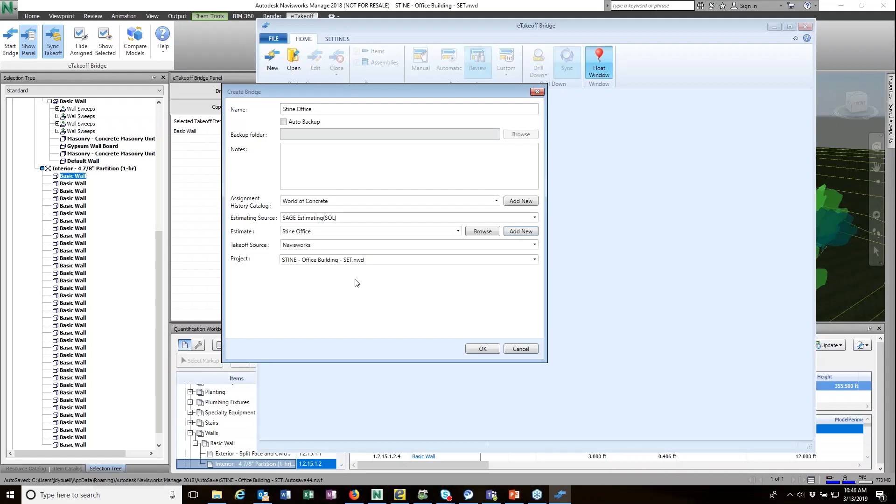Sage Bridge is smart enough to know what the takeoff source is, so I can have a takeoff source of Navisworks and a takeoff source of eTakeoff Dimension for 2D in the same project if I want to. So you can feed one project with a couple bridges, a couple different takeoff sources, if that's what's worked for you. Click OK.

Same thing. Here's my list of assemblies. And what I can do here is I've got my interior walls. I'm going to do a couple things here. I am going to append a description. I'm going to say interior floor 1. Hit enter, and it's going to append that to this basic wall description.

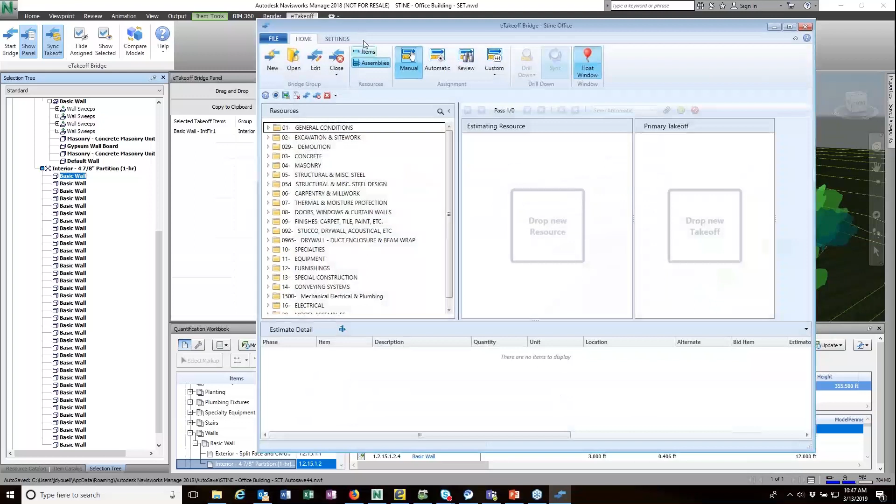And then I can take this wall and I'm going to bring bridge back up again here now. And I've got, let's see, 932. Yes, there we go. I'm going to take this wall and I'm going to drag it to that assembly. And you can see it's really simple, again, just for my demo purposes.

8.865 feet long, 12 feet high. That came, you can see model height was mapped from here, and there's the model length. One of the things about that I will tell you, here's the WBS information. There's that interior floor 1 that was mapped to the location. And not much else is mapped, as you can see.

That's a limitation of Navisworks. We can only map what we can get into the quantification workbook. If you have questions about that, please let me know. I'd be glad to get on the line with you and talk about that. I'm talking with another client right now about this, so this is a very pertinent discussion that we're having.

Anyway, I've mapped the length and the height of the wall. I can run the pass, it calculates the quantities, and I can send it to the estimate, just like we did before. So bridge is the same process that I'm working through as I worked through in the 2D takeoff.

I can do automatic takeoff just like I did with the other one. And I've got all of these walls that we've done takeoff on. Again, they're all automatic, so I can submit them. It's going to send 68 walls over to the estimate.

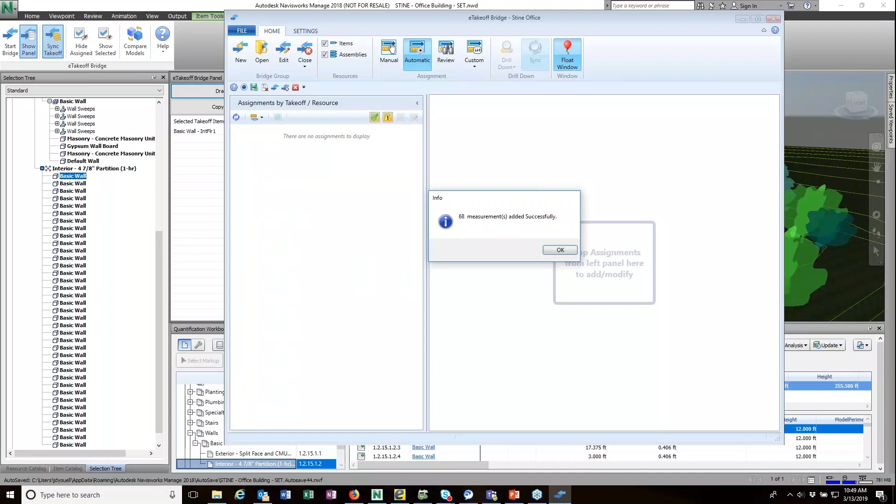So I think hopefully you can see that when you do get this set up, and it's not a huge amount of setup that you need to do, you can turn around an estimate really fast, especially from a model. Because a lot of your takeoff, I don't need to trace things. It's all done for me with the objects.

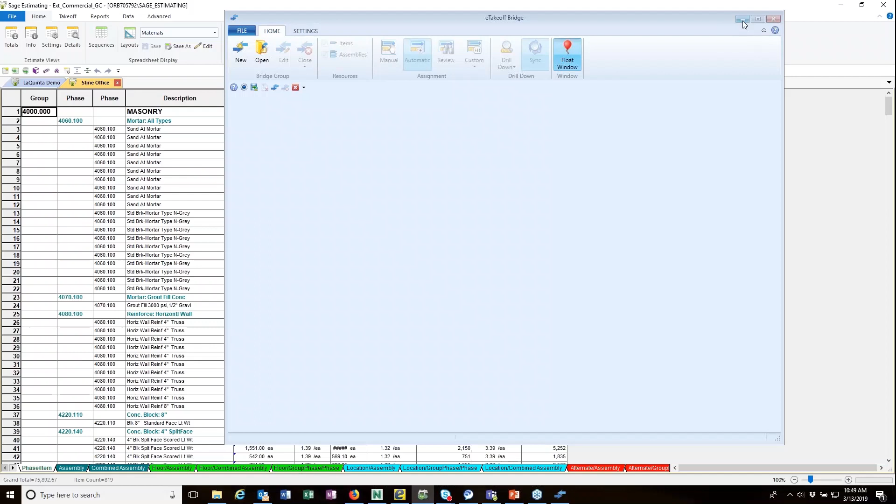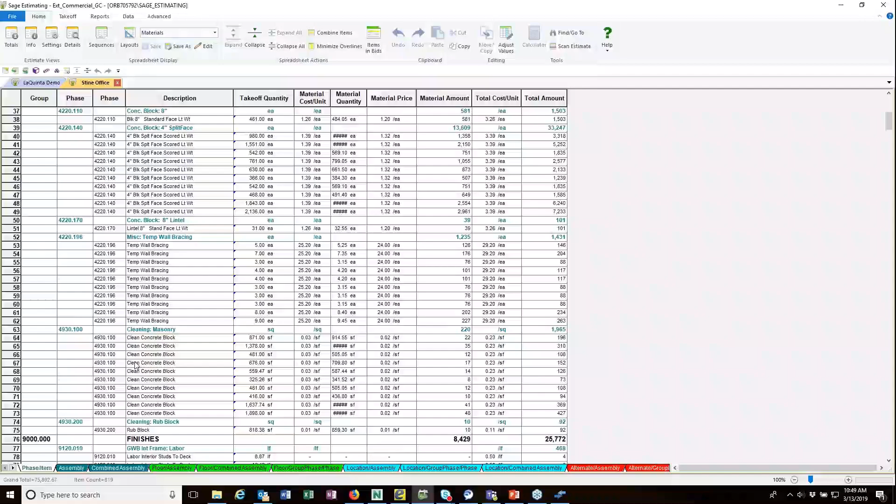So I can close this. I can go to the estimate. Here's my estimate for that building. And you can see I've got the different things here - there's the masonry, there's the finishes and all of that. I can do it by assembly.

Here's all my different assemblies. Same features that I noted with the other one. There's my totals, and so same things that you can do here with the spreadsheet that we talked about before. We can also notice that I have that blue little caret in the corner, and so that means I can drill down to bridge.

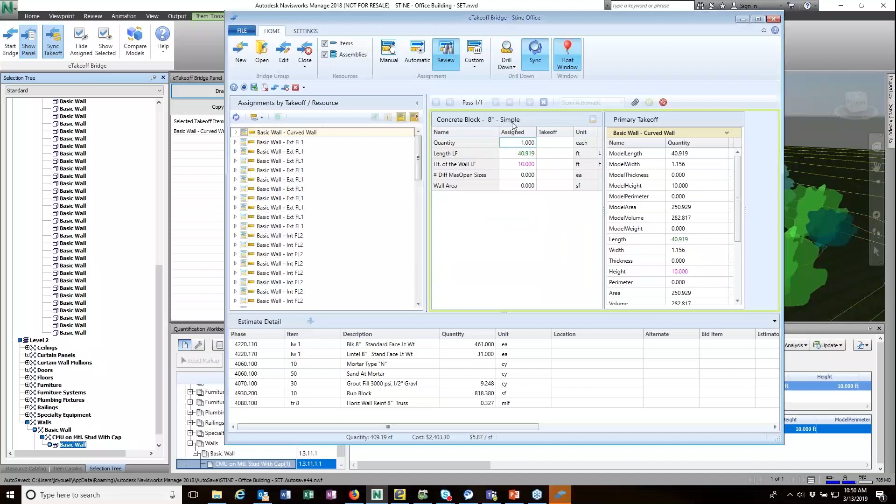And so when I drill down to bridge, that assembly will take me to that wall and show me the measurements and highlight the wall in the model. So I can drill down that way as well.

So another drill down. What happens if the model changes? And I know models never change, right? Nothing ever changes, but I'm just being a little facetious there.

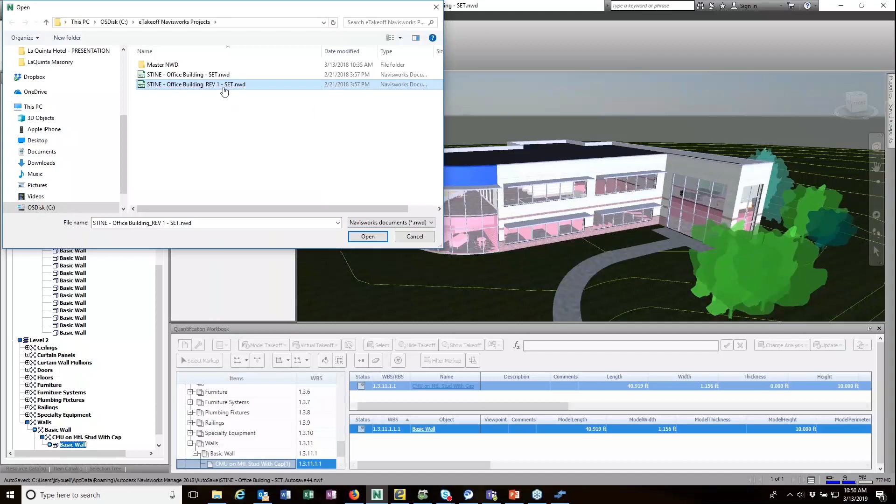If I click this compare model button, I can compare a new model to an older model, or older to the newest one. So I've got this one here that's a revision. I click that - do I want to compare it? I'm going to click yes, and when I do, this blue wall is highlighted, and watch the height of the wall. I click yes, and it got 2 feet taller.

So there were a bunch of changes in the model, and I don't know where they are. How can I find them? Bridge is going to do that for us.

So I start Bridge again, and remember this resource list. I can refresh it, and it shows the unchanged ones right here. I'll filter those out to make this easier. Here's the walls that were revised, here's a wall that was deleted, and there were also walls that were added. I'll show you those in just a second.

What I can do is come in here and see the change. The wall got 2 feet taller. Notice the quantities down here. If I click this, send it to the estimate, that one goes away in this list. I can do the rest of those for this.

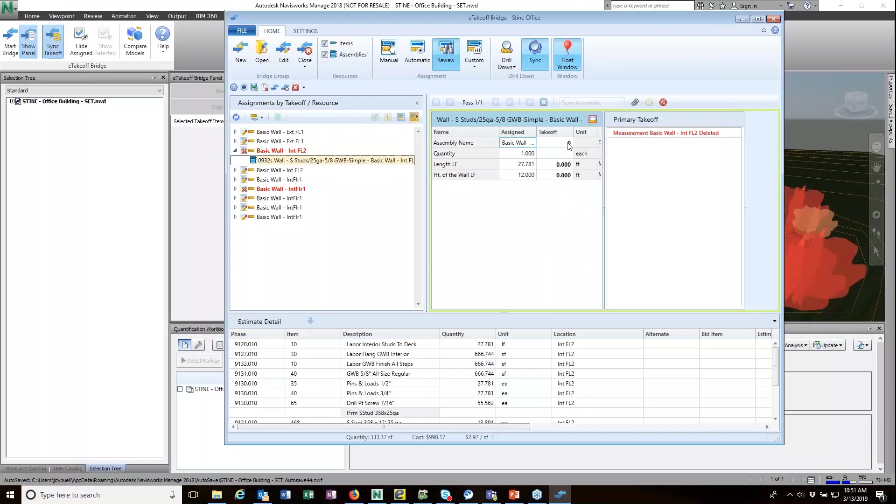I can also come in here and say, here's one, and this one was deleted. Notice that everything is zeroed here. I can run that pass, everything gets deleted, send that to the estimate, and that wall is gone.

So I can go through these individually, changing those. I can also go here to automatic mode, and these are walls that were added. So I've taken care of all three conditions that could happen: revised walls, deleted walls, and added walls. So I can run the pass, or send them automatically to the estimate.

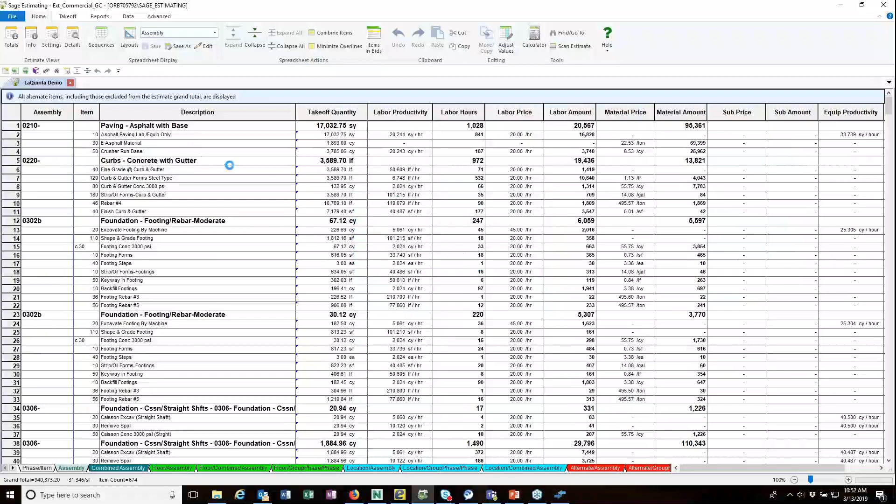There we go. All right, so I'm going to close Bridge and go to the estimate. Minimize this, click OK there. There it is, there's the updated quantity right there.

And so I've got the estimate updated automatically from the model that quickly, and I can get those changes turned around real fast. There's my totals there, and I've got that. So again, I can see how things are going there.

All right, so Navisworks for 2D to 3D, Dimension for 2D, that's what we can do. There are reports we can run, especially if you're familiar with reports in Crystal. There's advanced functionality with alternates, so I can do alternates in here as well. All of that is available to me here.

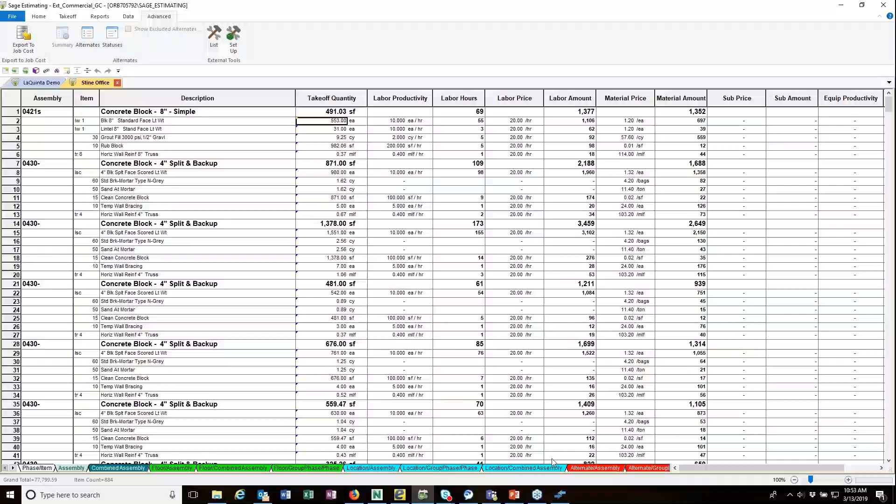So with that, I'd like to switch back here to my PowerPoint slideshow from the current slide.